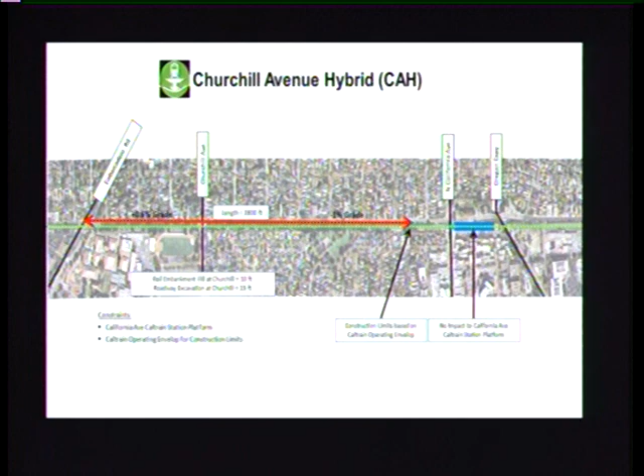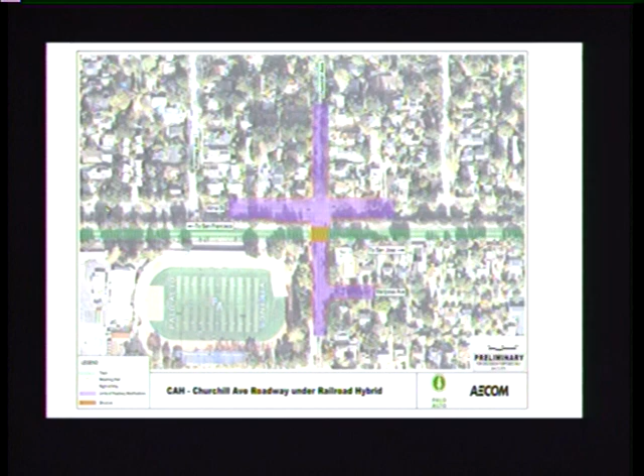What this means in geometry, in impacts, this is an exhibit showing the roadway limits of construction. On Churchill, Churchill is running up and down on this photograph. Let's see if I can get this mouse to work. The purple represents the limits of construction of roadway on Churchill, Alma, and Mariposa.

For the sake of the engineering design, we assumed that the design speeds were at 25 miles per hour. The roadway profile for Churchill is going down at a 7% grade.

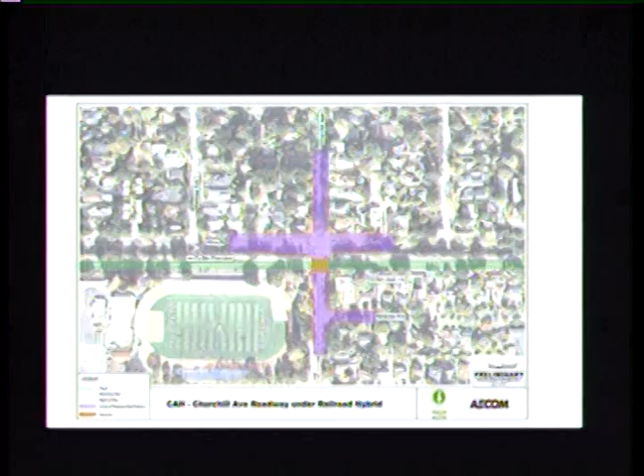This is basically, I'll use the word conform, but basically at this point on Churchill, that's where we start the road lowering down so it gets below grade, and its maximum excavation would be at the crossing of the railroad. And then it starts to raise back up.

Here we're using about a 7% grade. 5% grade is what we typically would see for ADA handicap. So in this case, for the 7%, we'd have to be looking at maybe doing something of a different profile for a sidewalk. In this case, we assumed a 5% grade on Alma as well as a 5% grade on Mariposa, and these are basically the limits of construction for the roadway.

With this hybrid here, we have a potential to impact 14 to 22 residential properties. It'll have visual impacts. Just to give you some context, this hybrid is similar to San Carlos in the fact that the roadway is lowered about 12 to 15 feet, and the rail is raised about 10 feet.

Are you saying like the Holly Street? Excuse me, yes, Holly Street. Thank you.

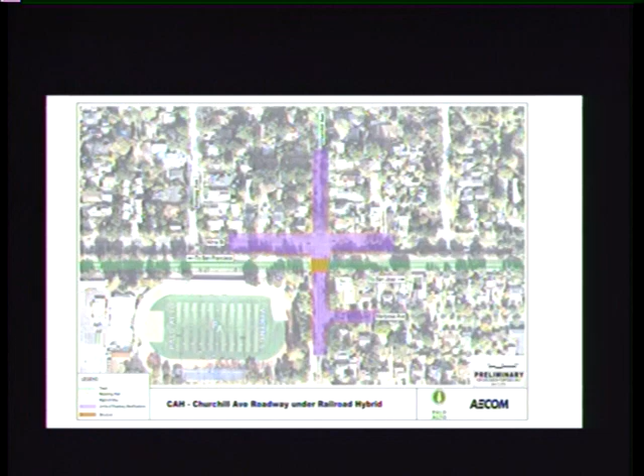Moving to the reverse hybrid, again, the analysis is very similar in the fact that we have the California Avenue Caltrain station as a constraint, as well as the Embarcadero existing underpass as a constraint.

We come off the Embarcadero, I'll just start from there, at a 1% grade down. That means by Churchill, the rail is down about 6 feet.

The difference in criteria here is that the required vertical clearance for a rail under a roadway structure is significantly more, on the order of 22.5 feet for Caltrain and 27.5 feet for high-speed rail.

So therefore, our construction, the roadway would be elevated about 22 feet above the top of rail, 22 feet of embankment fill above its current location. We still have, and then we would be rising back up on the rail at a 0.5% grade. That gets us to conform, or to not impact the Caltrain station platform at California Avenue.

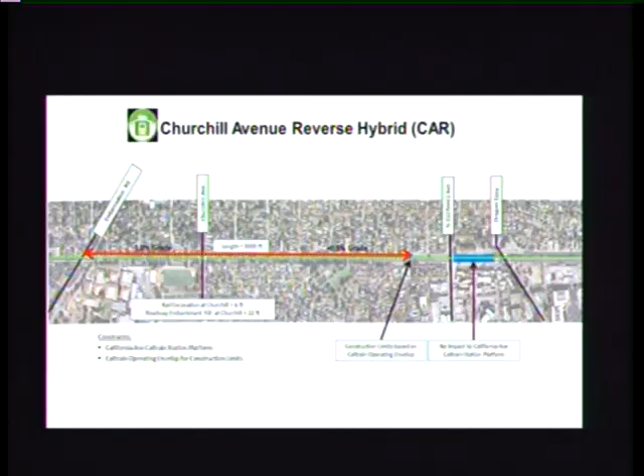There's a potential for 40 plus residential properties to be impacted in this alternative, on the order of 40 plus.

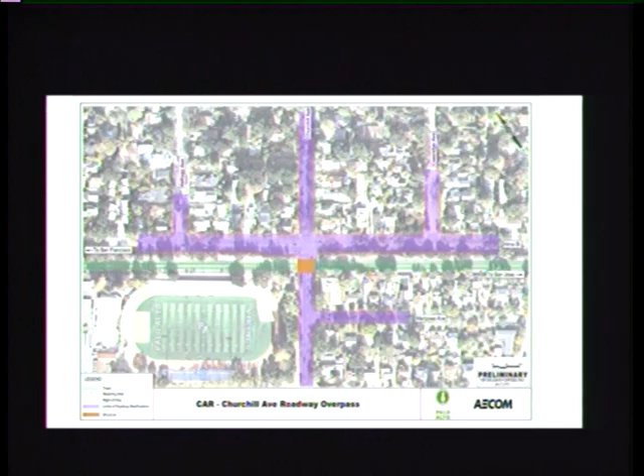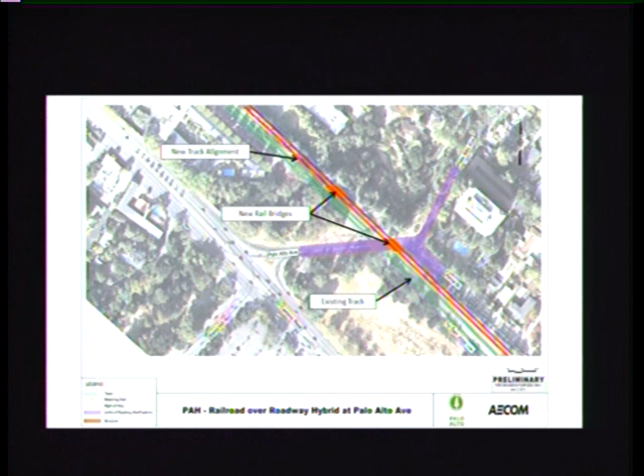And with that, I'd open it up to questions. As Josh mentioned, these are just initial engineering, kind of a technical look at this in terms of what's published criteria and how that applies to an alternative.

Any other comments from staff right now? You don't have to, but...

Well, I did want to give you kind of my technical take on the results, and I think, given the property impacts that are likely with the two Churchill hybrids, the hybrid and the reverse hybrid, I think I would have some pretty strong reservations about carrying forward those two ideas. There is a concern, though, that by removing those two, we'd be left with only the closure idea and the no-build idea.

We would still have two on the table that we could carry forward and perform a more detailed analysis on. For Palo Alto Avenue, given the fact that there's fairly limited or possibly no impacts to residential properties, I think that may warrant a little more additional analysis, maybe not carry it all the way forward to the full-blown alternatives analysis, but I think we could do a little more detailed look at the alignment and how it may impact the park and the tree.